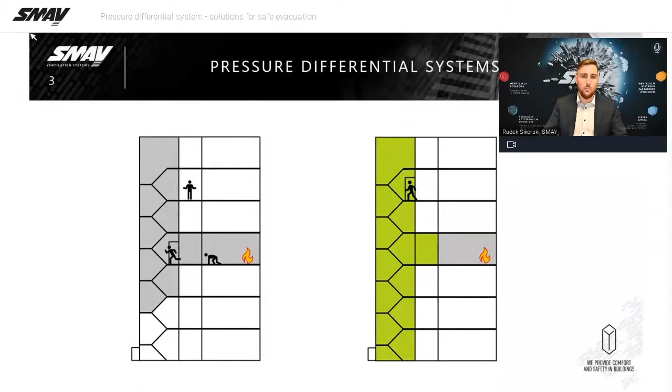Safe evacuation requires visibility of at least 3 to 5 meters if you are familiar with the building, and 15 to 20 meters if not. Meanwhile, dense smoke can reduce visibility down to several centimeters, making evacuation impossible. For this reason, the law often requires escape routes to be protected against smoke penetration to increase fire safety.

To do this, a certain amount of air must be pumped into the stairwell space. Air will escape through all possible routes, through open doors, through gaps around closed doors, through leaks in walls, through windows, etc. Therefore, in the design process, we need to determine all leaks in order to select proper air volumes. By supplying the right amount of air, we achieve and maintain an overpressure, for example, 50 Pascal.

This is necessary to prevent smoke from entering the stairwell through the gaps. When the doors leading to the fire floor are opened, the pressure drops and smoke can get into the staircase. To prevent this, the system has to increase the air volume so that a certain airflow velocity is achieved on doors to counteract the inflow of smoke. This ensures that escape routes remain smoke-free and evacuation is possible.

It is very important to remember to provide an air release path from the fire floor. Without it, the flow criterion will not be met. It can be mechanical smoke extraction, a gravitational shaft, or an automatically opened window. What's more, different spaces can be protected depending on building architecture and fire regulations. Usually they are staircases, often lobbies and elevator shafts, less often corridors. I'll tell you later how to approach each of these.

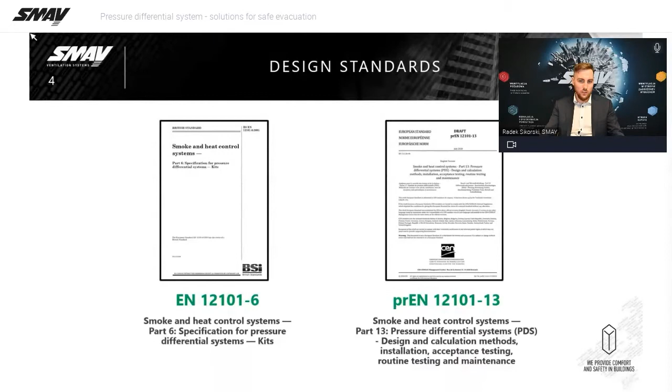Draft of 12101 Part 13 introduced many changes. The most significant of them are shown in this table. The acceptable range of pressure in the stairwell has been increased from 50 Pascal plus minus 5 Pascal to a minimum of 30 Pascal, while the maximum will be set by the criterion of 100 Newton of force required to open the door.

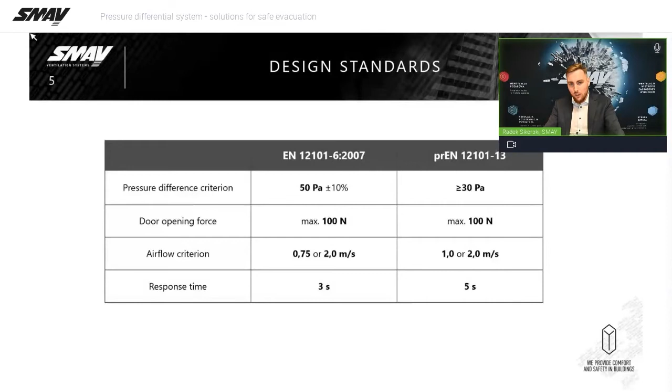The system divisions, air velocities in the airflow criterion, and response times for dynamic systems have also changed.

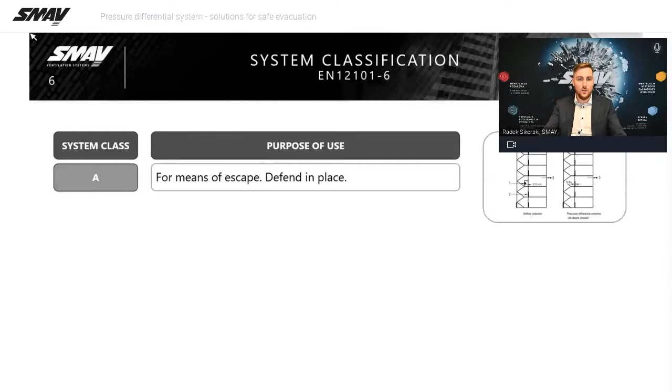For example, in the current standard, we have 6 classes of systems. They differ in the purpose and place of use, the functional requirements, and configuration in which these requirements are to be met. So we have System A for residential buildings where defense in place is possible. System B is used to allow firefighting crews to take action to fully developed fire.

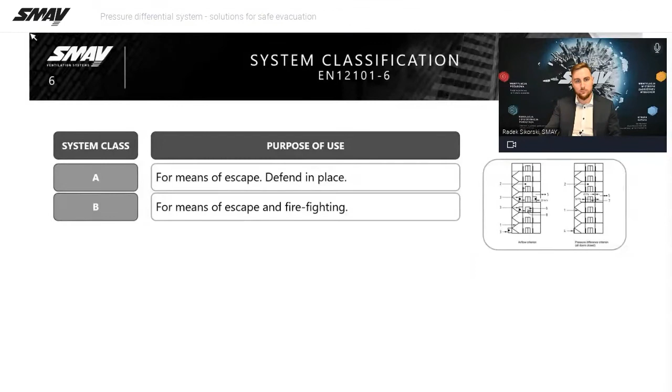System C is for simultaneous evacuation, used, for example, in offices, universities, or theaters. System D is for buildings where there is a risk of sleep, such as hospitals or hotels. System E is for phased evacuation, for example, in prisons or hospitals. And System F is rarely used in specific buildings, for example, industrial ones.

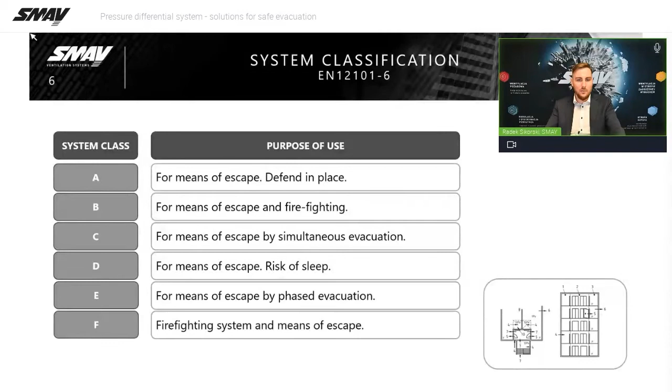For many designers and fire consultants, system division is quite complicated and causes difficulties at the concept stage to choose which class should be applied and how it should be applied. For this reason, only 2 system classes were included in 12101 Part 13.

The configuration of both is exactly the same. The only difference is the air velocity achieved in the airflow criterion. The guidelines for using one or the other system are also very clear.

If you have low or medium residential building, or building equipped with water extinguish system, or if your fire authorities agree, you can use class 1. In any other case, you have to use class 2.

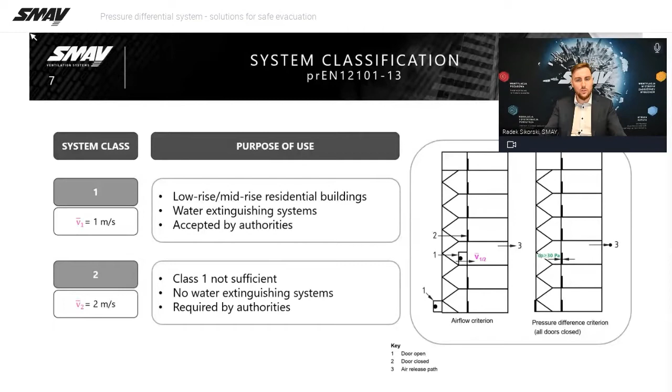An important provision that is repeated in both standards is the one about alternative solutions. It makes the standard functionally oriented, meaning that it allows for alternative design solutions as long as the functional requirements can be met. It is very useful, especially when you are dealing with an existing building and don't have the opportunity to make a lot of changes in the architecture of the building.

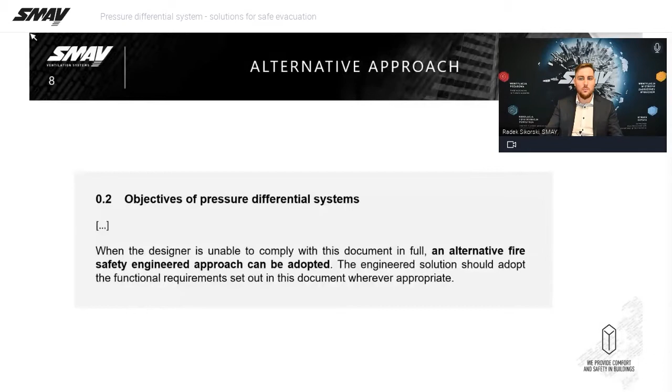One remark, please note that since 12101 Part 6 is still a valid standard, and it is still unclear when the new standard will become mandatory, whenever I refer to the standard during my presentation, it will always be current 12101 Part 6.

How to achieve the correct system functionality? There are 2 approaches to pressure differential systems. Traditional systems are based on fans with constant flow and mechanical pressure relief dampers located on the roof. It is still a very popular solution.

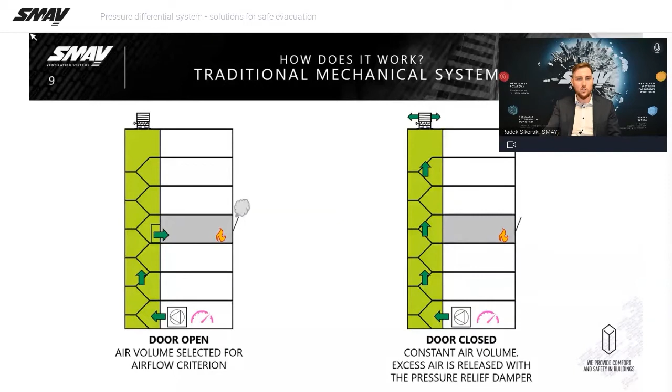In those systems, the air volume is selected for the airflow criterion, and when the door is closed, the pressure relief damper releases the excess air.

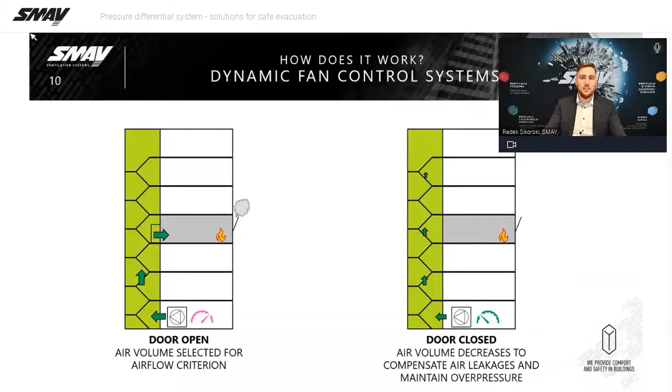The second approach is to dynamically control the supply airflow depending on the criterion that is being met at the moment. When all the doors are closed, the device aims to maintain an overpressure of 50 Pascal. When the door is open, the pressure in the stairwell decreases and the fan increases the amount of supplied air to reach the airflow criterion.

Such systems do not need a pressure relief damper. This is my approach because it is much more flexible and in some weather conditions much more reliable. I'll show you later why.

We had a great opportunity to develop our system in a real-scale testing lab. In cooperation with top specialists of Warsaw and Krakow Universities of Technology, we have used a 90-meter high structure of an unfinished skyscraper from the 70s, popularly known as skeleton, to test different innovative solutions. The aim of the studies was to develop a system that would eliminate the negative impact of the stack effect on the pressure differential system. The research took 2 years, so we tested our solutions in all possible weather conditions.

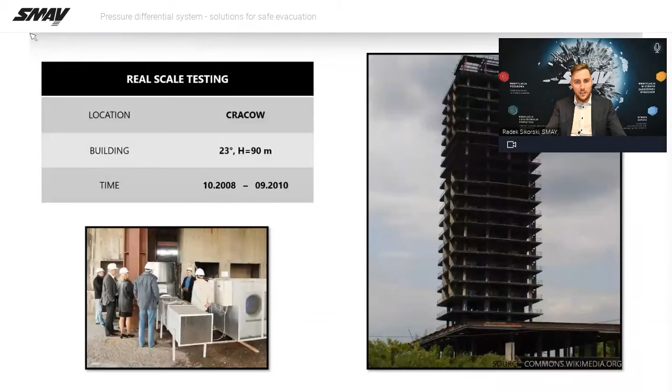The result of our work was a safety-way system based on iSWAY pressurization units. I'll show you later how this building looks today, but first I'd like to show you the video demonstrating our iSWAY device on the example of a staircase in a shopping mall. Pressure differential systems.

iSWAY type compact pressurization unit, construction and use.

The solutions of the SMAY company, based on iSWAY compact pressurization units, are applied in various types of buildings, but also in buildings where simultaneous evacuation is carried out, for example, in shopping malls.

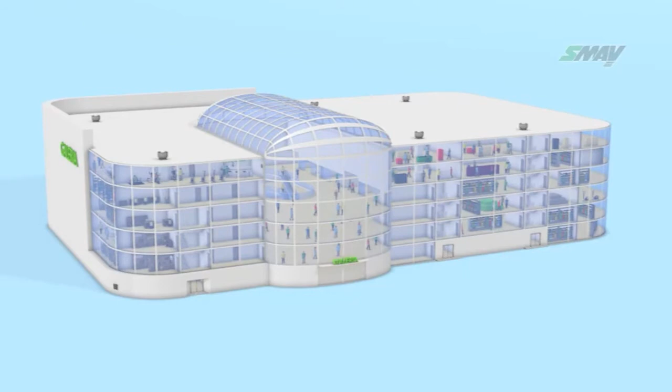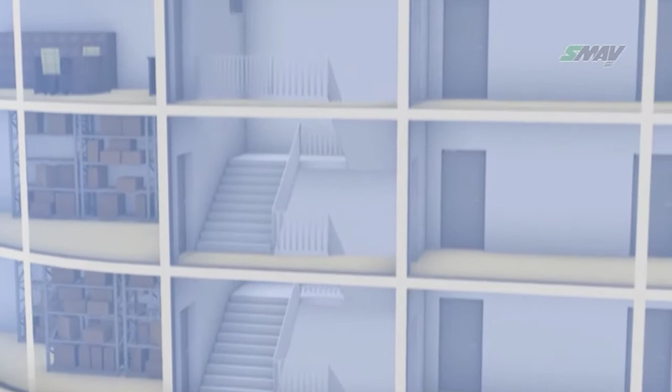During this evacuation, the pressure differential system has to respond dynamically to the changeable demands resulting from the actual stage of evacuation. In such buildings, staircases are often located in the internal part of the building and may serve selected floors only. There can be other rooms above them, which is why it is impossible to install barometric overpressure dampers.

At the same time, the system has to cope with the problem of great variations in airflow supplied to the staircase. During the realization of the pressure criterion, the airflow is small, and during the evacuation, the required flow is even 10 times bigger, which poses a problem in the precise control of the system.

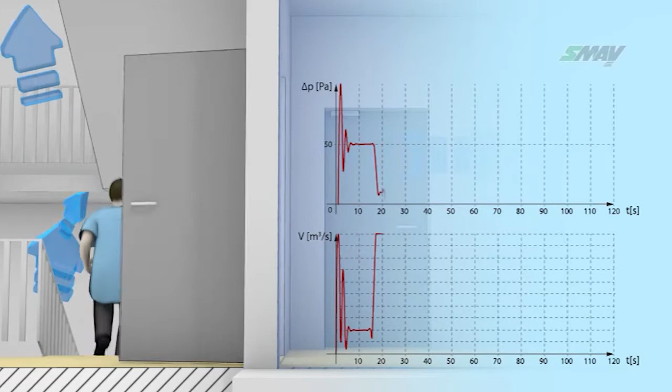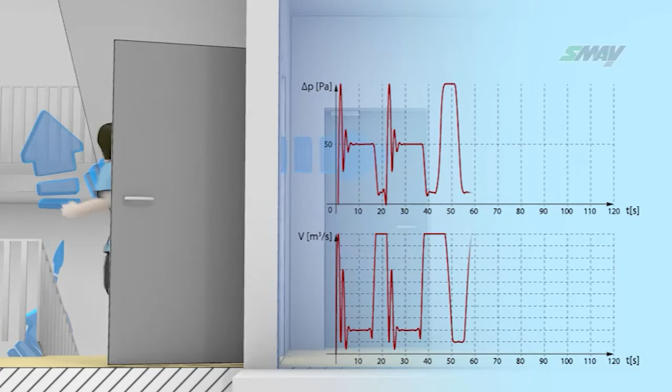In this case, a simple pressurization system may not fulfill its role because it is exposed to great variations in the conditions of operation, which may result in oscillations of the system and, as a consequence, may endanger the evacuating people.

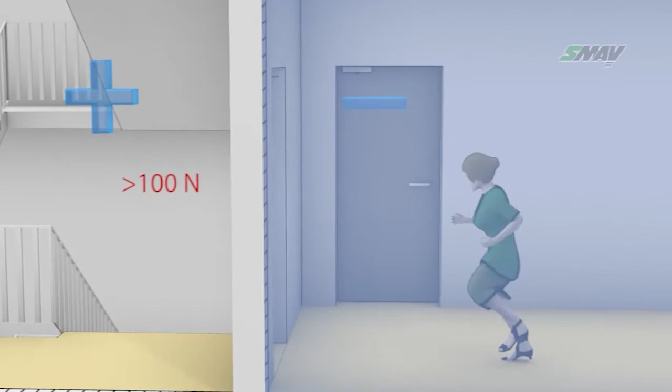For example, the oscillatory increase of pressure to 150 pascals will increase the required door opening force to 200 newtons, which will hinder its opening. The power necessary to open the door exceeds the required level of 100 newtons, which may last from 10 to 20 seconds. The staircase will be cut off from the evacuating people.

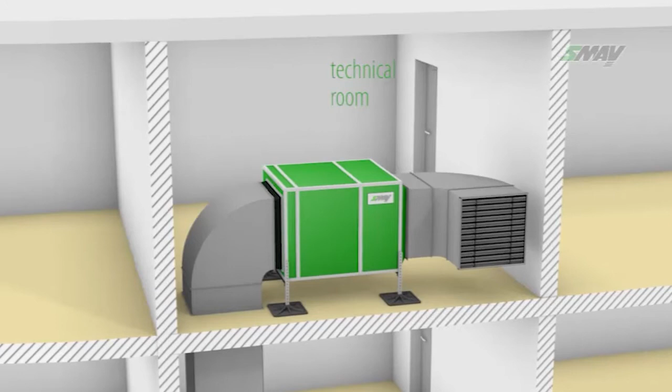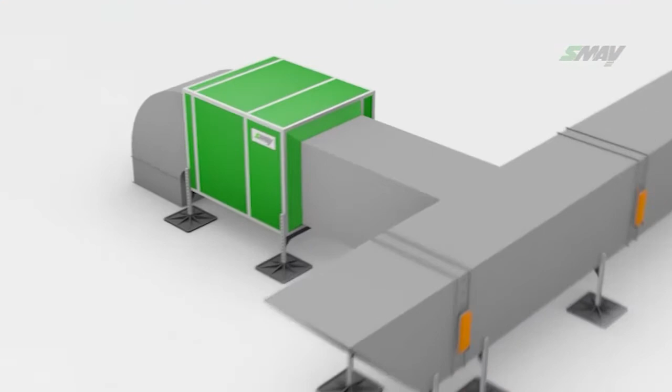In order to preclude such a situation, the SMAY company suggests the use of modular solutions based on iSWAY compact pressurization units with extra fast-acting automatics based on predictive algorithms that identify the object of regulation. The units are small and light, which allows installing them in any place in or outside the building, both in a vertical or a horizontal position.

The main components of the iSWAY unit include an air supply fan, a measuring board enabling continuous measurement of the actual airflow rate, a shutoff damper, a smoke detector, a differential pressure sensor, and a frequency inverter with the fire mode function. Control is performed with a state-of-the-art controller provided by the Plum company.

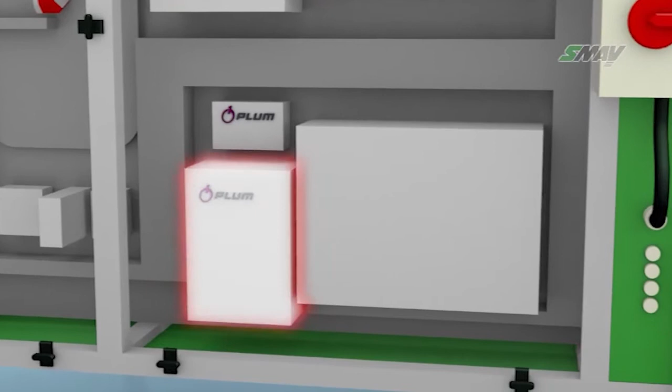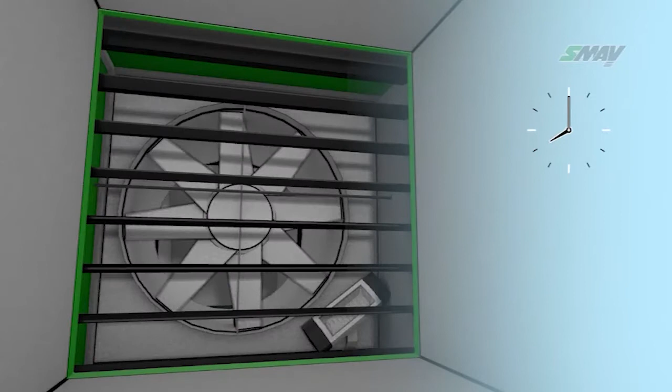Constant monitoring of electrical circuits, supplemented with automatically performed periodical functionality tests, confirms continuous standby mode of the iSWAY unit. During these tests, the shut-off damper opens and the fan operates at low frequencies for a few seconds, which confirms that the system is operative.

The data acquired during such tests are recorded in the memory of the device, and the reports can be additionally printed. Tests are repeated every 24 hours. They take a few seconds and do not affect the regular business of people using the building.

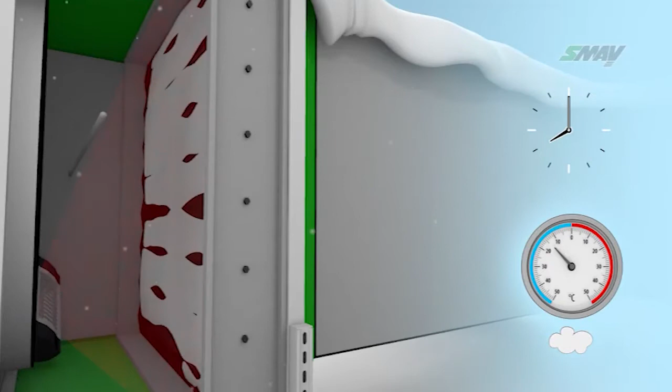In order to ensure reliability of the device placed outside the building in all weather conditions, the i-SMAY units are equipped with an anti-frost system, which counteracts the freezing of the specifically structured shut-off dampers. Owing to this solution, the system can be activated when the ambient temperature drops below 12 degrees Celsius.

If the device does not pass the 24-hour tests, the indicator on the panel will switch on and the alarm message "General Failure" will be sent to the fire alarm system, which will enable a quick elimination of its cause.

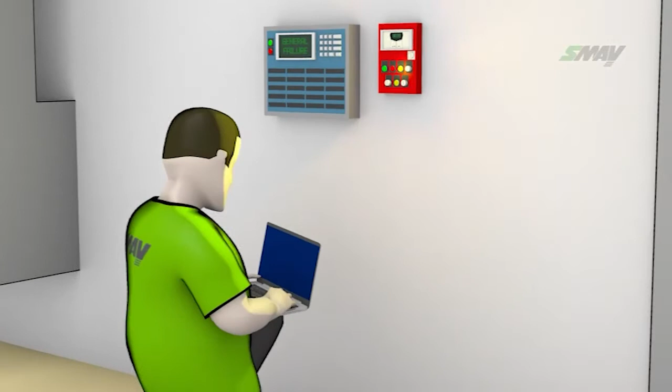When fire breaks out and smoke activates smoke sensors, this information is transmitted to fire alarm control and indicating equipment, which switches the i-SMAY unit on. Information about switching on the i-SMAY unit is then transmitted to the TSS board.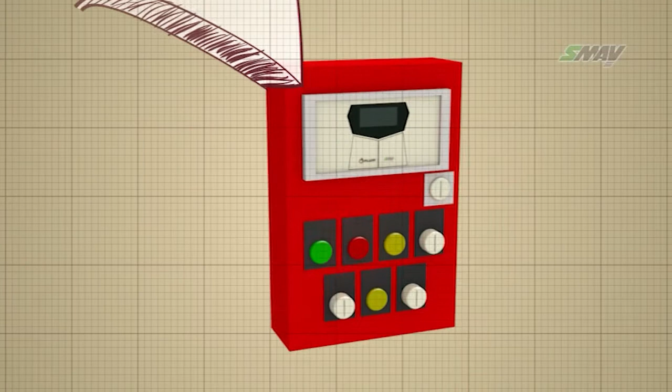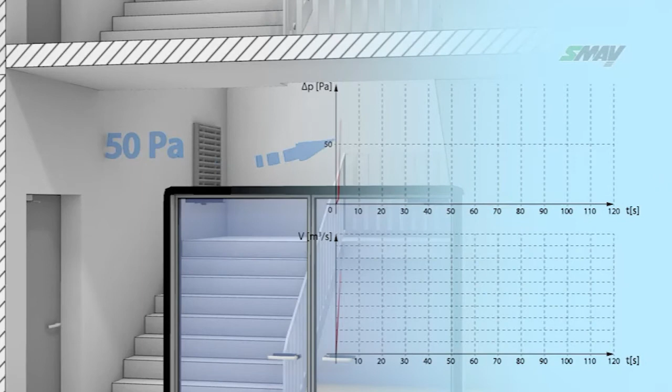If there is a fire in the building, the pressure differential system will be activated, producing a set value of overpressure inside the staircase, for example 50 pascals. After opening the door to the staircase, the pressure will drop and, as a result, the unit will increase the air supply rate.

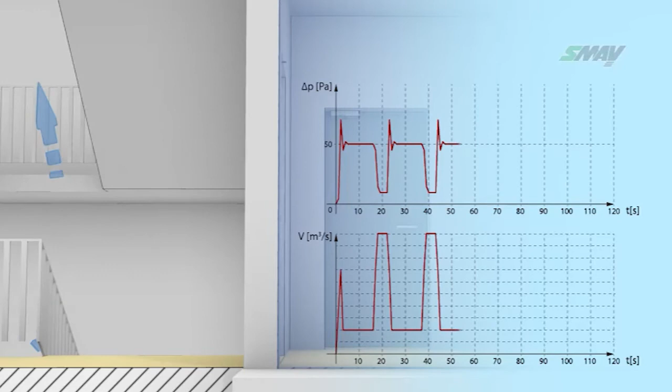Owing to the use of fast-acting adaptive automatics, the unit immediately adjusts its capacity to the actual requirements resulting from the evacuation stage. The reliability and efficiency of the iSWAY devices are attested by the technical approval and the certificate of conformity.

In this slideshow, we can see available types of iSWAY device. We have the standard FC compact unit and two ductless versions, the roof-mounted RFC type and the wall-mounted WFC type.

As you can see in this table, all of them have a very wide operating range. Obtaining such low minimum air volumes is possible thanks to a predictive algorithm based on a neural network for constant learning.

Basically, from the first cycles of operation, the device remembers what frequency it reached in which event configuration. Thanks to this, after detecting a sudden change in pressure, the device immediately knows that the criterion has changed and what value of frequency it should reach.

Physically, it is accomplished with an inverter and braking resistor. With these three components, our iSWAY can go from very high air outputs to very low in less than 3 seconds.

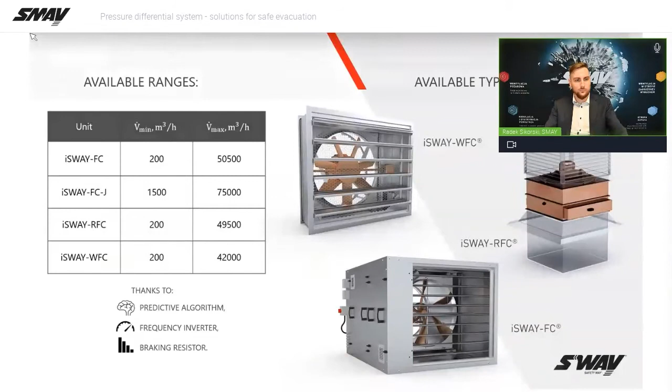Now I'll move to examples of design solutions, starting with low and mid-rise buildings. Systems for them are not complicated. Depending on the height of the building, they can be supplied with a single point for buildings lower than 11 meters according to the standard,

or they can be multi-point supplied if higher. In this illustration, I have shown the location of units on the roof. It was because this is where architects usually locate technical equipment. But please remember that it is always better to locate them on the ground floor to avoid smoke suction.

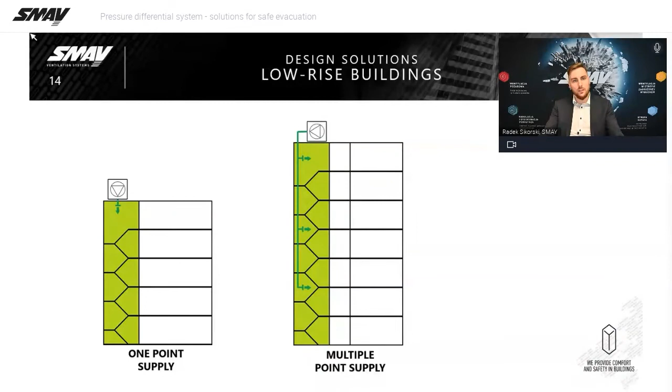In the case of location on the roof, the standard recommends the use of a double air intake system. As I said before, our iSWAYs don't require a pressure relief damper. This is especially useful in staircases without external partitions, for example, those serving underground floors.

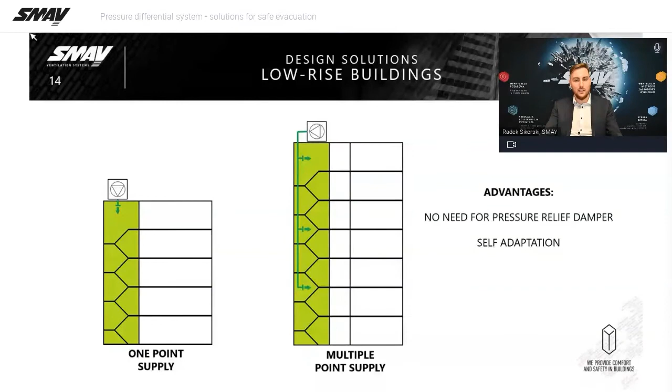Another big advantage of our system is the possibility of auto-adaptation. Thanks to variable flow and the predictive algorithm, the device is able to calibrate itself to maintain the set pressure, even if the degree of tightness of the staircase or the adaptation of the floor, and therefore the resistance of the air release path, have changed. There is no need for manual recalibration like there is in mechanical systems.

Our system with multi-point supply was used in Marriott Hotel on Malta and in hundreds of other projects as well. This system can be used in practically any type of building.

The situation changes when we talk about staircases in high-rise buildings. In such a situation, the stack effect has a very significant impact on the pressure distribution over the entire height of the staircase.

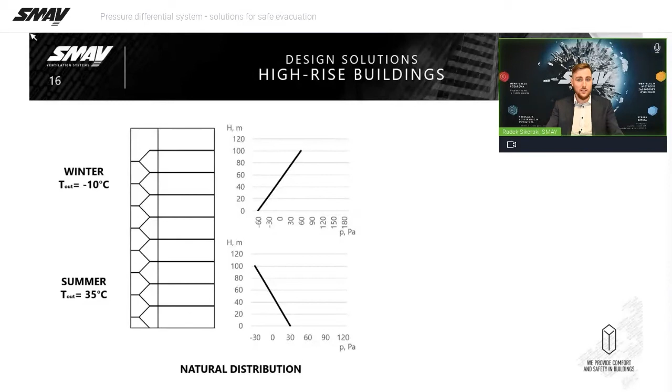The stack effect, also called the chimney effect, is the effect of heating or cooling internal air. Due to the difference in density and convection, the air moves up or falls down depending on the season, causing a pressure difference. What is interesting, the supply of large outside air volumes during pressure differential system operation

moves the pressure range, but doesn't change the pressure difference between the top and bottom of the stairwell. The reason for this is the large heat accumulation capacity of the concrete walls of the staircase. They give or take heat to or from the fresh air.

This can cause problems with door opening when the overpressure system is operating. This is proven by basic calculation, CFD simulations, tests on real objects, and by years of experience of anybody who worked with pressure differential systems.

Of course, this is only a simplified illustration of the process, and in traditional systems during the winter season, this effect will be partially reduced on the top floors by a pressure relief damper located on the roof. But the problem is very significant in very high buildings and at high temperatures, such as those in warm climates.

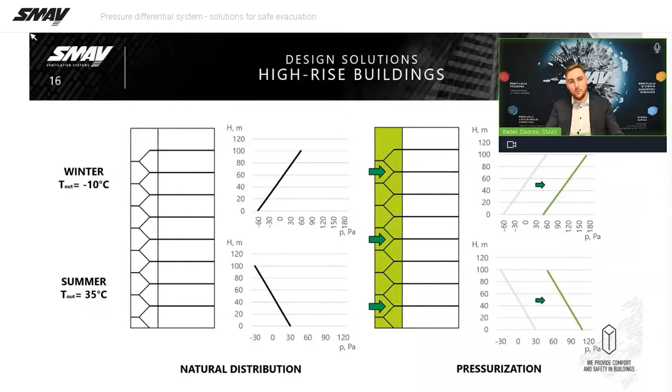The solution we developed for high-rise buildings is to use a flow system. The flow system consists of two reversible units. One of them supplies air, and the second one extracts it. In this way, we take advantage of the staircase airflow resistance to compensate for the natural pressure gradient.

The airflow achieved in this way, in combination with dynamically adapting fans, makes it possible to achieve even pressure distribution throughout the entire height of the staircase, and to eliminate the risk of exceeding the required force to open the door.

The big advantage of this system is that it is effective under all conditions, regardless of the external temperature, and immediately after activation.

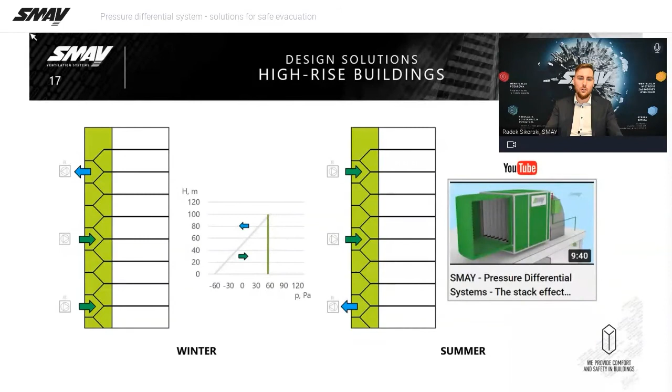If you want to learn more about the stack effect and our flow system, I invite you to watch our video about it on YouTube. This system was adopted, among others, in Sky Tower in Wrocław, or in Złota 44 in Warsaw.

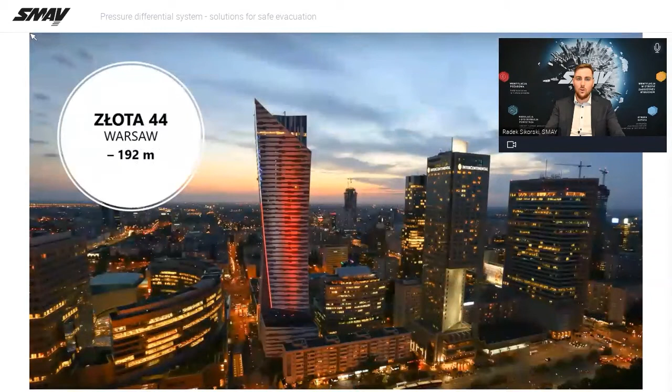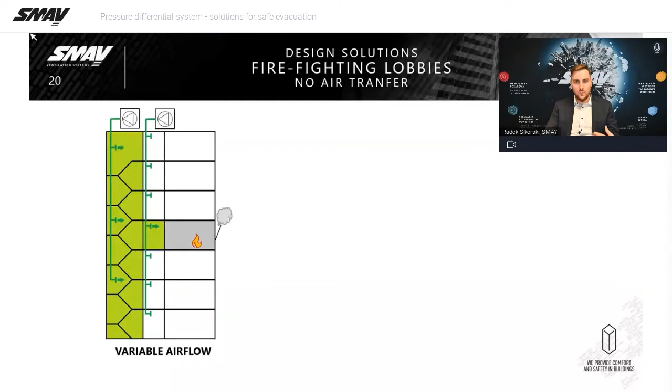The next group of concerns are fire lobbies. Sometimes they are supplied by transfer dampers from the staircase to achieve a resultant pressure value, while according to the standard, they should be supplied by a separate system. The problem is that they are very, very small, so the air volumes needed to achieve the pressure difference criterion is also very small. Meanwhile, the airflow criterion for the speed of 2 meters in System B

usually requires 15 to 17,000 cubic meters per hour.

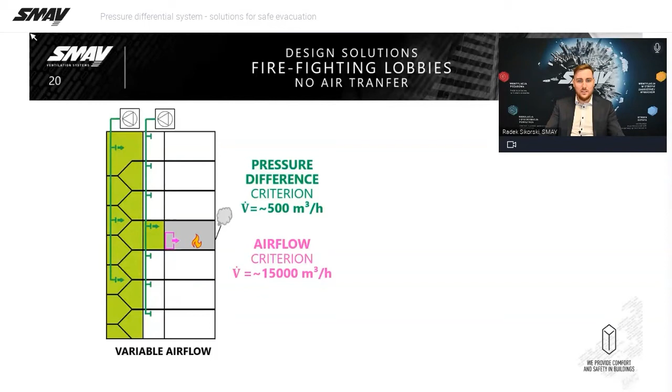And this is where the wide operating range of our devices, able to achieve both values, comes to help. There is no need to artificially unseal the lobby, and there is no need to install additional dampers.

The situation is a little different when it comes to smoke removal systems. Please remember that such installation must always have air compensation to avoid the risk of under pressure in the corridor or accommodation.

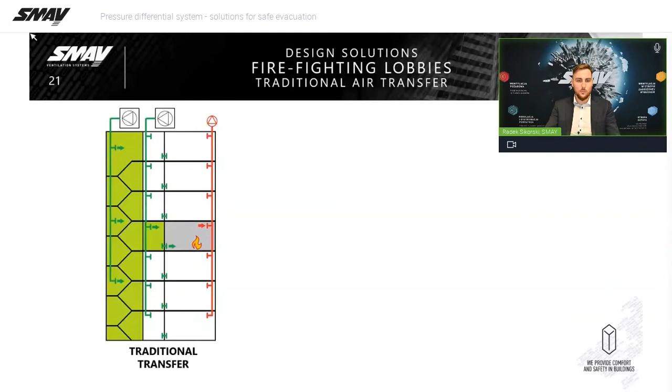This can be achieved by an automatically opened compensation window or through an additional shaft. If there is no possibility to locate them, the air transfer damper equipped with a multi-blade smoke control damper can be used. When the door is closed, air passes through the transfer damper, but when the door is opened, air will always take the path of lowest resistance, so it will pass through the door and the airflow criterion will be met.

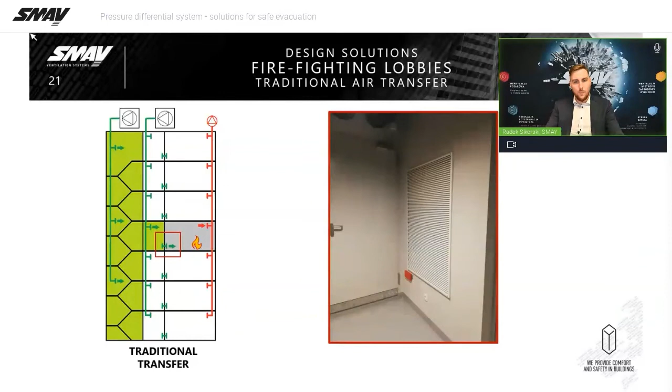On this picture, you can see how such a damper looks like. As you can see, it takes quite a lot of space.

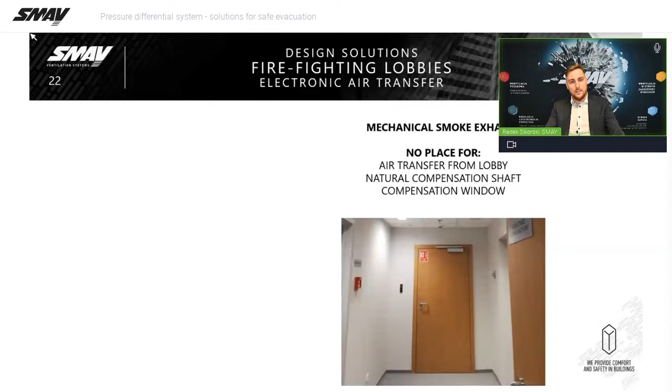So what to do if we don't have a lot of space? Nowadays, it is very common to make lobbies as small as possible to maximize commercial area. It is also very common that the architect doesn't allow locating a traditional air transfer damper due to aesthetic reasons.

In such situations, electronically controlled air transfer can be used. This is a solution based on two fast-acting dampers, which, based on electronic pressure measurement, direct the air into the lobby or into the corridor.

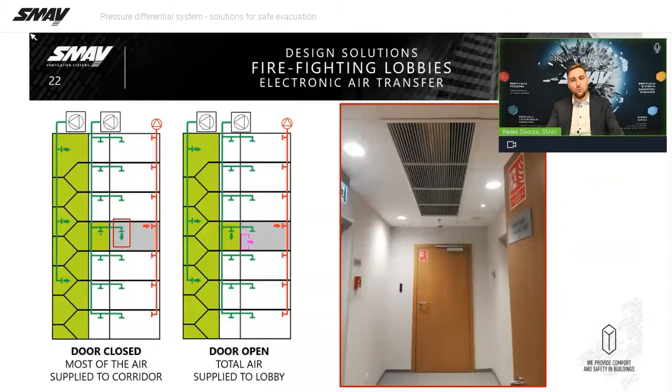When the door is closed, some part of the air is directed into the lobby just to keep 45 Pascal inside, while most is directed into the corridor to compensate the exhaust. When the door is opened, total air volume is directed to the lobby to achieve the airflow criterion.

This is how the air supply inside the lobby looks like. This solution has some advantages over traditional transfers. We can use less air volume, so devices and shafts can be smaller, and we can use cheaper one-blade smoke control dampers instead of multi-blade ones.

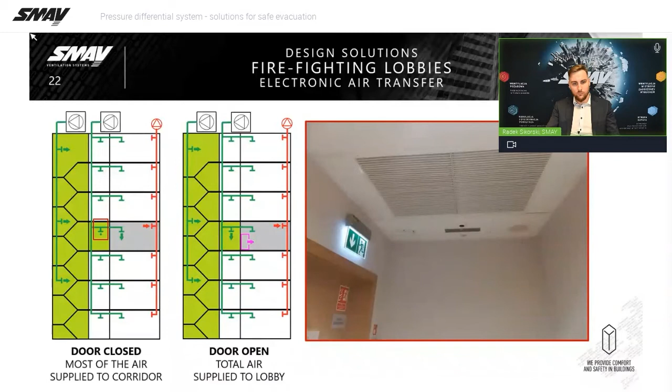Electronically controlled air transfer was used, among others, in Unity Tower in Krakow. This building was built on a steel construction skeleton, the same building we used for real scale tests. As you can see, we put theory into practice, and this building is also protected with our flow system.

Another example is corridor smoke extraction. Sometimes national regulation requires corridor smoke extraction. Sometimes the smoke extraction is used as an air release path for the pressure differential system.

If there is no space for compensation windows, natural compensation shaft, or air transfers, traditional or electronic, there is the possibility to supply makeup air with an additional iSWAY. The air can be supplied with a very small shaft, much smaller than for natural compensation.

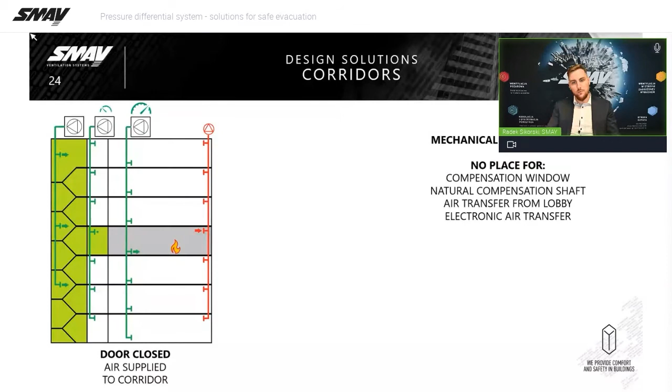The unit for the lobby operates on minimal air volumes to keep a set overpressure, for example 45 Pascal. When someone opens the door, the unit increases its rotary speed and the compensation iSWAY decreases its airflow. As a result, most of the air will pass through the door, achieving the airflow criterion.

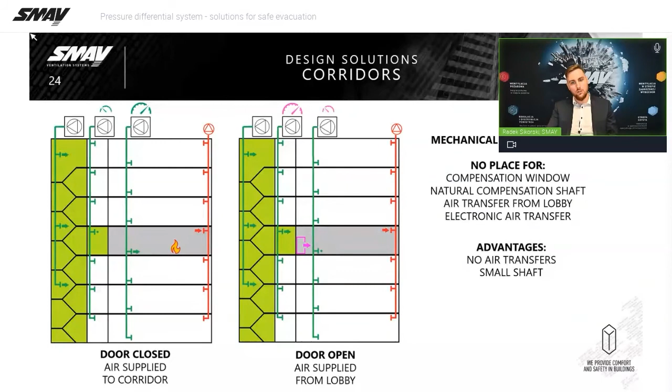And the last design example, elevator shafts. They can be supplied from one point if they are lower than 30 meters, and from multi-point supply if higher. In both variants, we take measurement in the middle of the shaft to control the system based on average shaft pressure.

This supply method causes a wider pressure gradient, depending on height and temperature, of course, even up to 30 Pascal to each side. But to be honest, it doesn't influence safety as much as it would in a staircase. For that reason, fire authorities usually agree to such a pressure range.

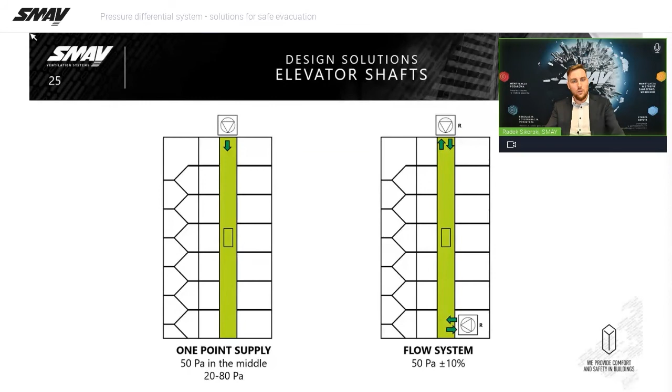If you want to achieve a pressure range within the limits required by the standard, which is plus minus 10%, we can also use two reversible units to control pressure precisely.

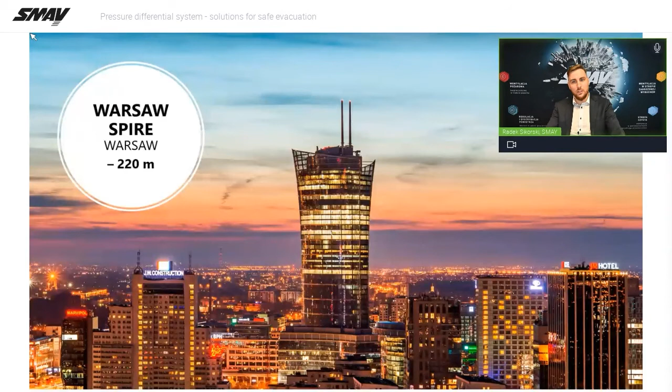Let me present another of our references. Office building Warsaw Spire, with a height of 220 meters, is also equipped with our SafetyWay flow system.

And the last reference building I wanted to share with you is Varso Tower in Warsaw. Currently under construction, it is already the highest building in Poland and also in the European Union.

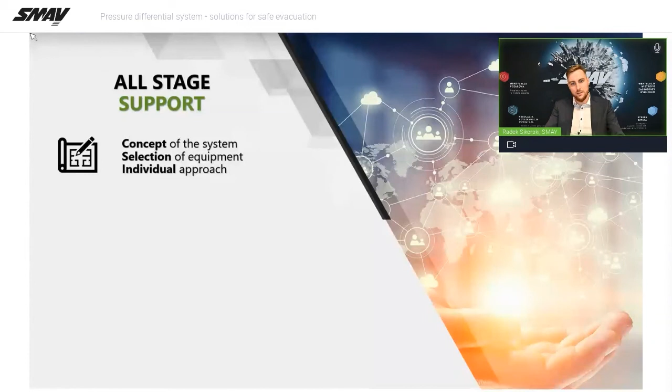We provide comprehensive support for our clients at each stage of a project. We assist our clients on the concept and design phases, giving not only advice but also providing necessary materials. We produce all devices and components, and if there is a need and possibility, customize them to meet individual needs. We offer startup and commissioning support, and of course, we provide warranty and service support.

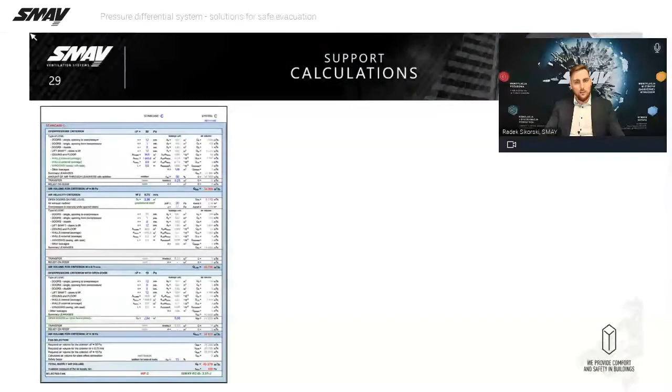You can start with sending us architectural layouts. Then we can calculate air leakage of protected space for you. On that basis, we will select devices and provide you selection cards with all technical parameters.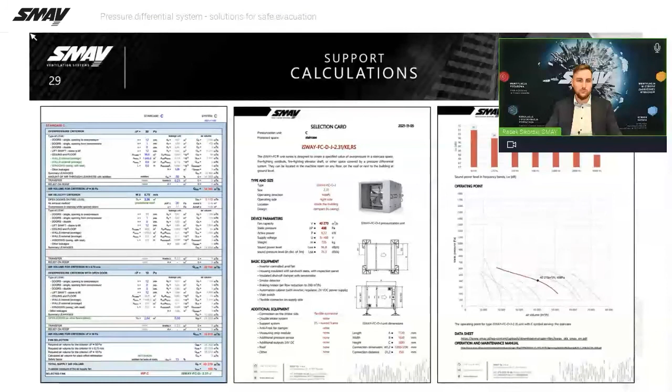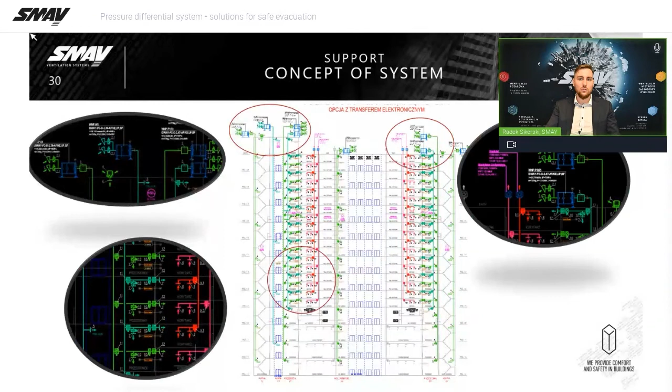We prepare a diagram of our concept proposal. Then we consult it with the designer and adjust it according to individual needs, because every project is unique. We can prepare specification of all components of the system. Once the conceptual phase is complete, if there is a need, we can prepare also written technical description.

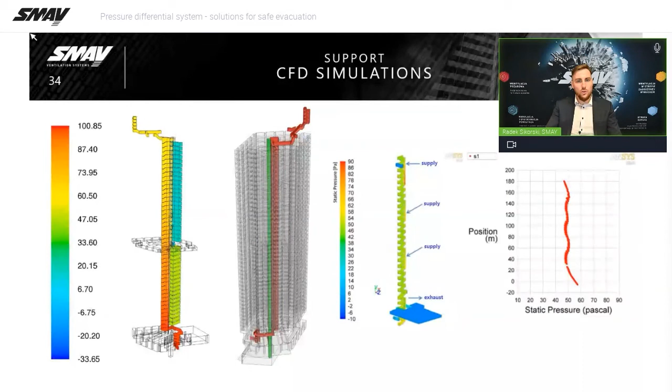We provide electrical guidelines that includes all connections and wire types. In justified cases, we are able to perform a CFD simulation to determine the realistic pressure distribution in the staircase. According to the draft of EN 12101 Part 13, it will be necessary for buildings higher than 60 meters. Simulations are performed by our research and analysis department using software from the ANSYS package.

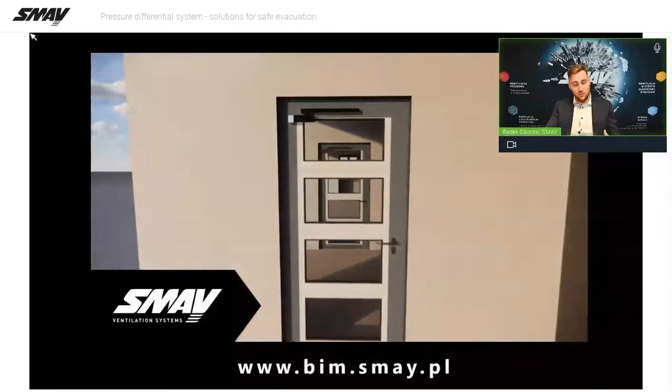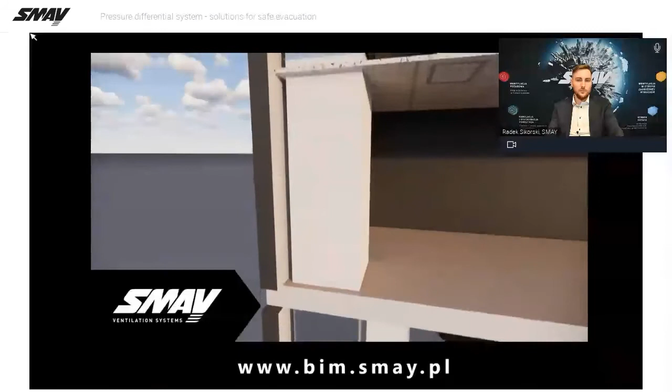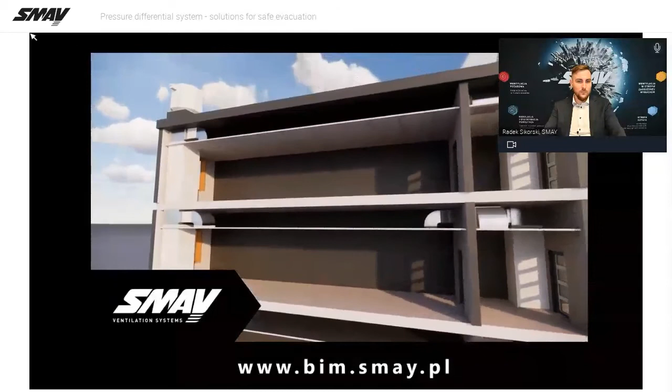We, as industry, are currently entering the era of digitization of building information. BIM is digital representation of all technical, physical, and also functional properties of buildings and its components. Smay is responding to the market expectations by providing libraries of our products to designers, architects, and BIM managers. On our website, you can find families of ventilation grills, smoke control ducts, air volume dampers, fire and smoke control dampers, and all types of iSWAYs. This makes it possible to build a model of the entire system in Revit software.

As we approach the end of the presentation, it is time to summarize. Our SafetyWay system means reliability. It has been thoroughly tested in independent laboratories, not only in Poland, but also in Germany. Reliability and effectiveness were tested after 10,000 door opening and closing cycles. Conducted tests showed that a correctly designed system can fully comply with the functional requirements defined by EN 12101 Part 6.

Operation security is also supported by automatic tests that the device performs itself every 24 hours. This was shown in the first video. The test results are stored in device memory and can be easily printed. In case of any malfunction, the system will immediately communicate the error to FAS.

Moreover, all components connected in the fire bus loop are continuously monitored for power presence in standby mode. Any failure will be immediately displayed on our control device.

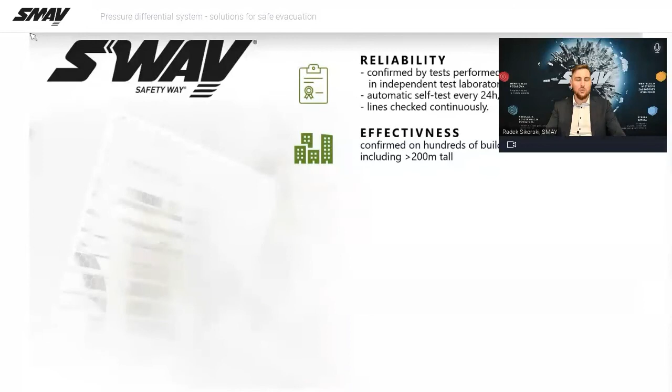SafetyWay means effectiveness. Our system was installed in hundreds of buildings in Poland and Europe. As you could see before, our system is very flexible, so it can be installed in any building type. But we also specialize in skyscrapers. Today, we ensure safe evacuation in many high-rise buildings, including taller than 200 meters.

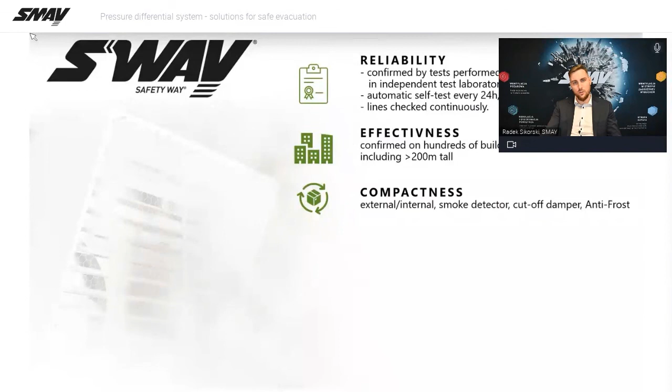Our iSWAY devices are compact units that include all necessary components. We have built-in smoke detector, cut-off damper, anti-frost system, and we can equip it with a dual intake system when located on the roof.

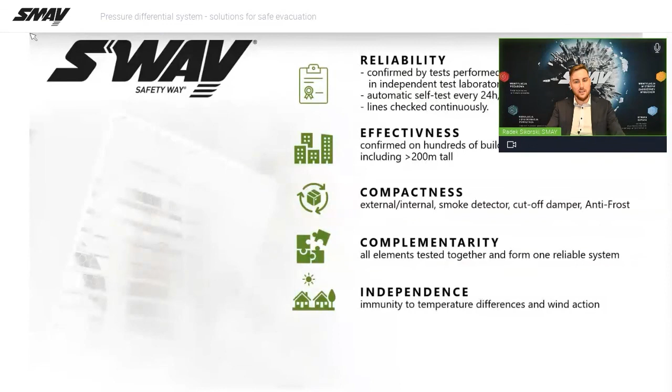Our advantage is also complementarity. All components are parts of one system. All of them were tested and certified together, so there is a certainty that they will perfectly cooperate together. We can offer systems that are independent of extreme temperature conditions, wind impact, and the height of building. Under all conditions, it will remain precisely set pressure over the entire height of the staircase, immediately after activation.

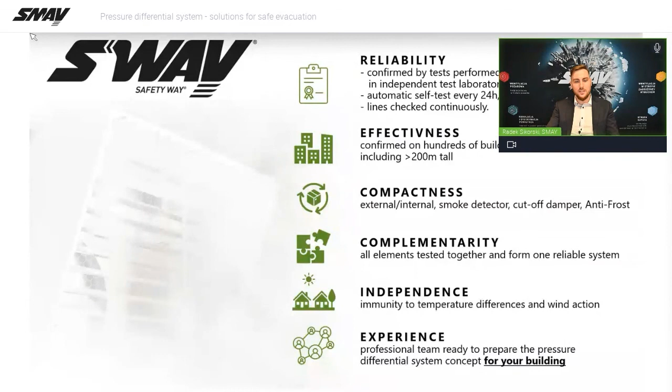And last but not least, we offer our support on any stage of the investment process. We always try to adapt our system to the individual needs of a particular project.